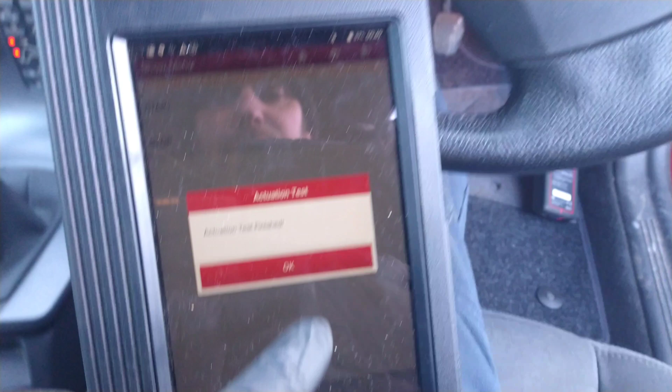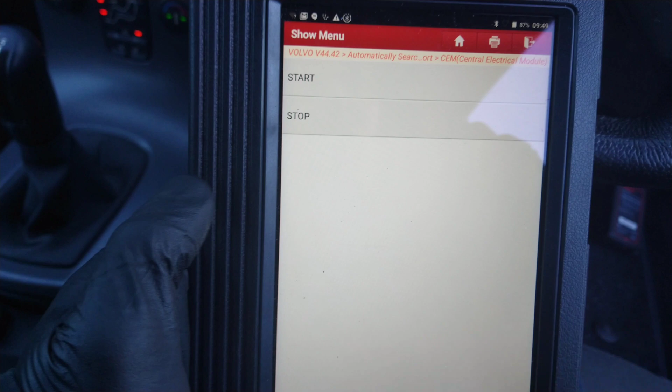Today I'm looking at a Volvo. This one has a problem with the boot won't open. So using the Launch I was able to activate it - I think you might have heard it there. So I know that the boot mechanism itself works. It's probably a switch fault if that's the case, so it gives us a direction.

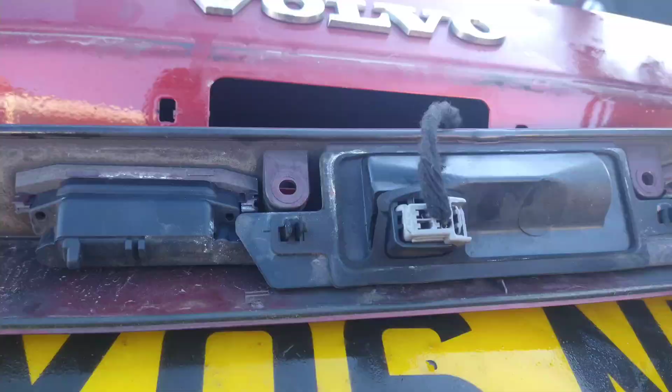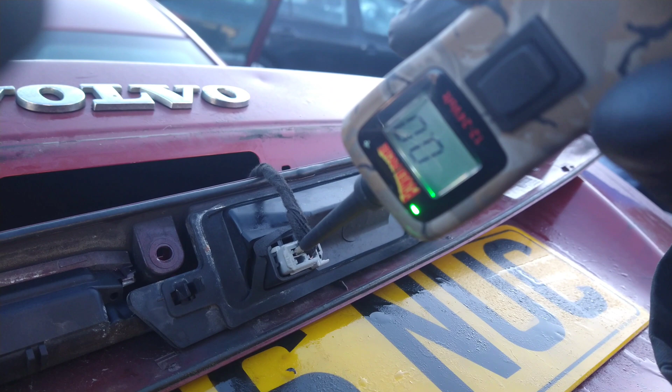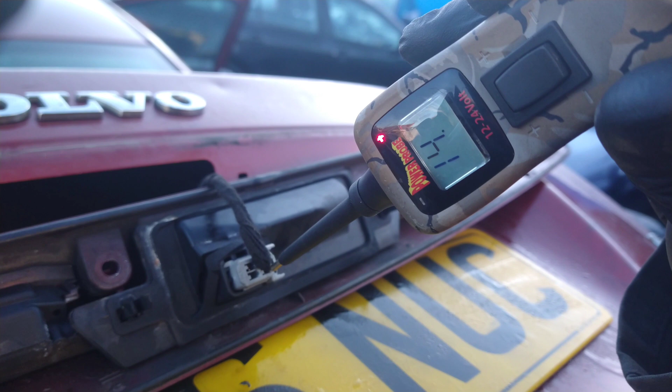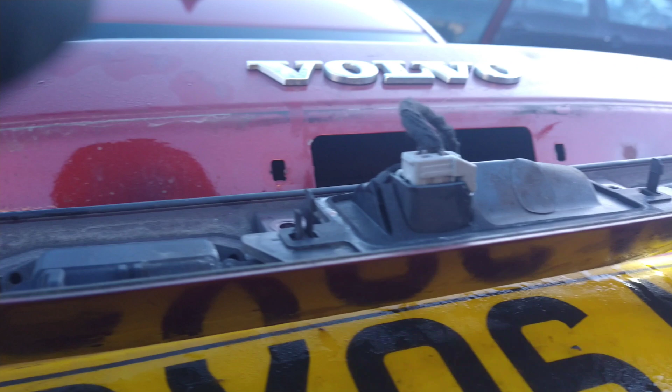If I go to the switch here, I've got a ground. It lights up with a green light, you see on there. So I get the ground with a green light. The power - you'll notice that when the switch is back in 2, it's actually duty cycled, and it's for the lights, license plate lights. When the car starts, it pulses the power, and when it's ignition on only, it's just on all the time. I've noticed that in a few other cars.

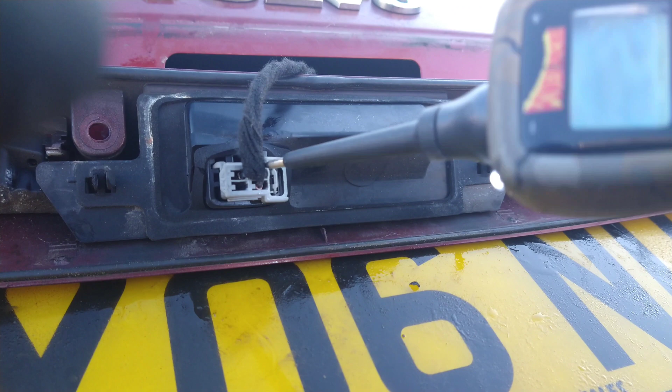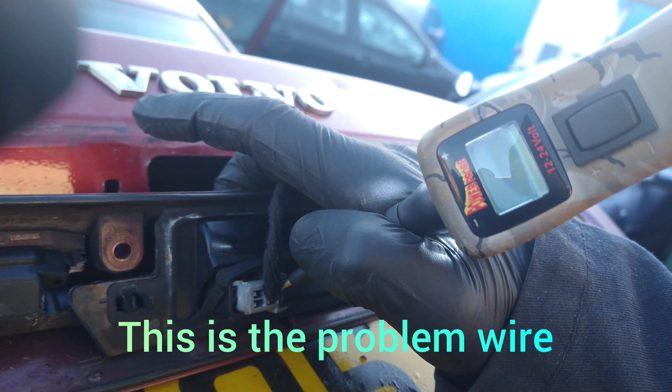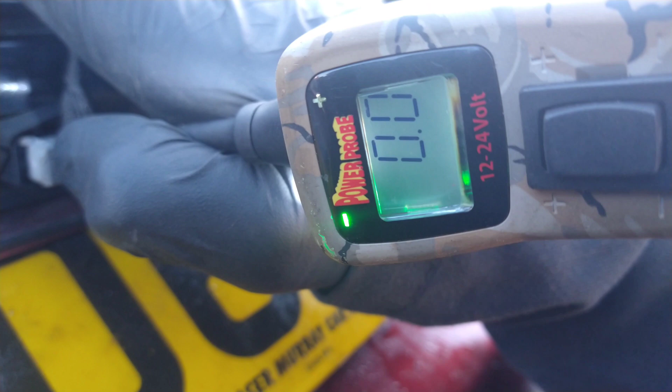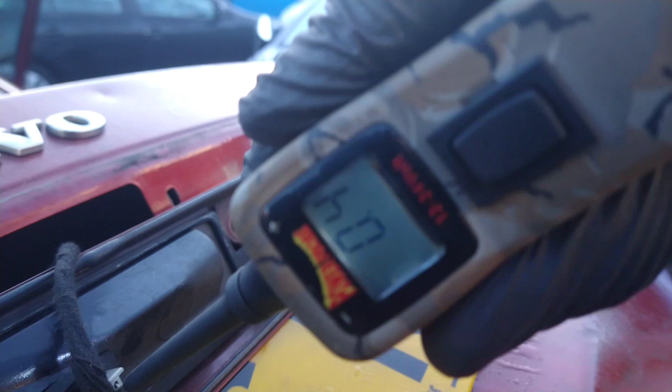And this last wire is doing nothing. I've got something there, occasionally I just got it there, but it's not enough. So what happens when I press the switch - it's hard to do it with not enough hands, but I'll try and press that. There, it lights up green. When I press the switch, it lights up green, so it means it gives it a ground. So I would expect some sort of a biased voltage. It could even be as high as 12 volts, but it wouldn't light up the light on here. It would just be a voltage, and that's not enough.

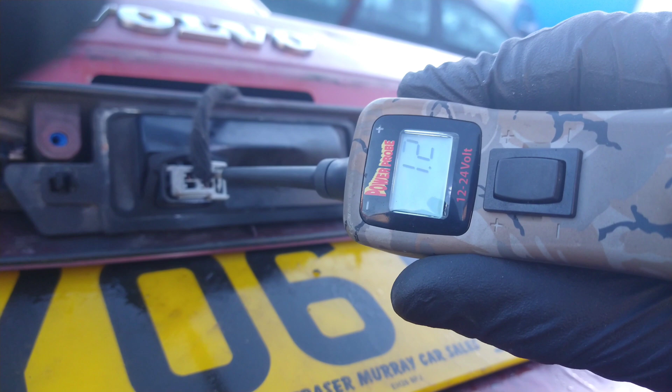So we now need to find out - that would be coming from the body control module, and when you press the switch, the voltage that was on there would get pulled to ground, because the resistor would be at the other end of the line in the body control module. And that would let it know to activate this.

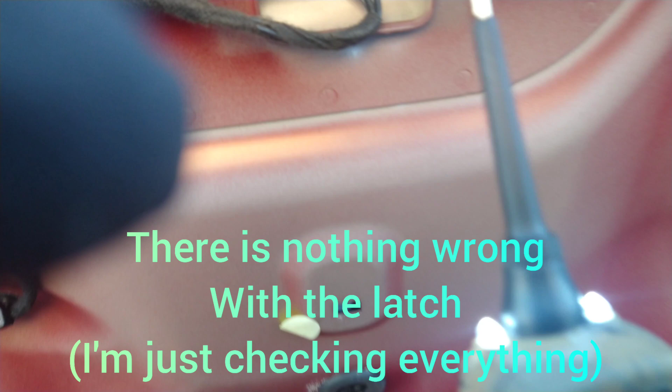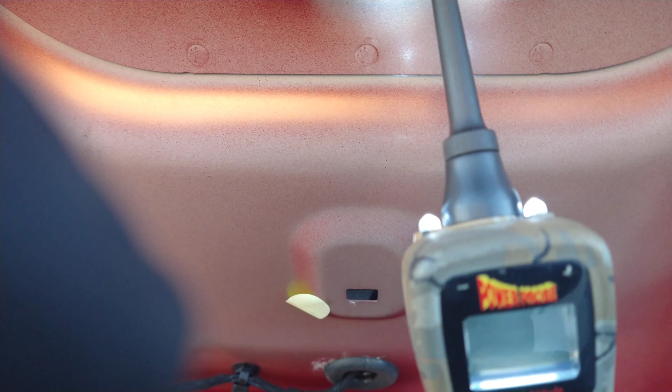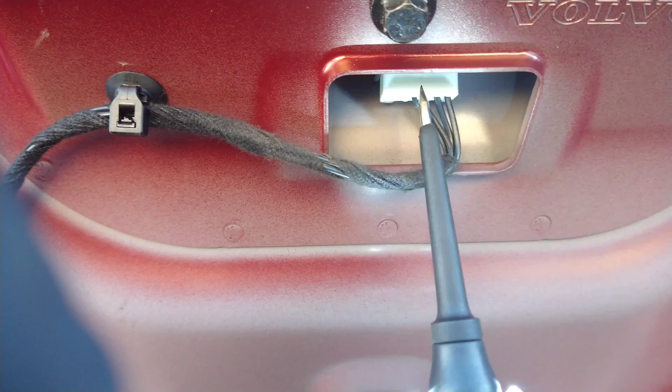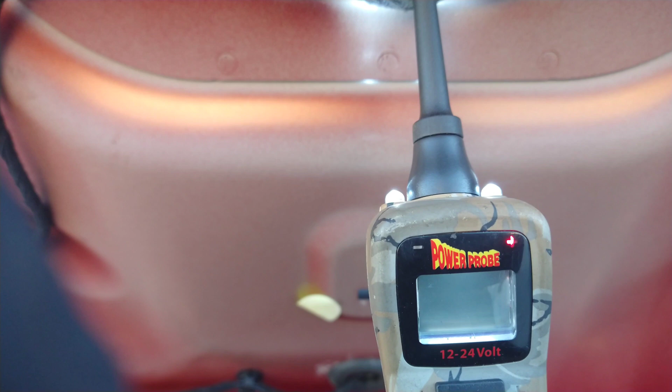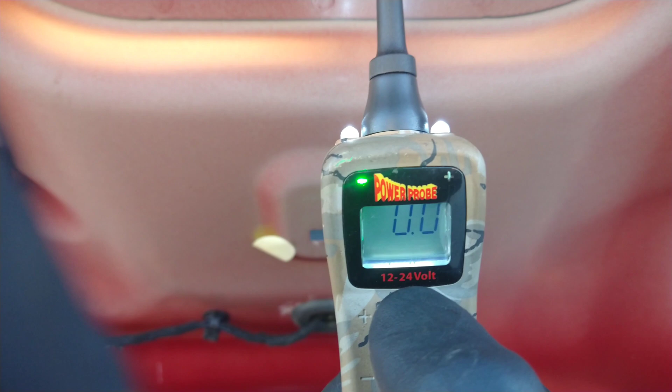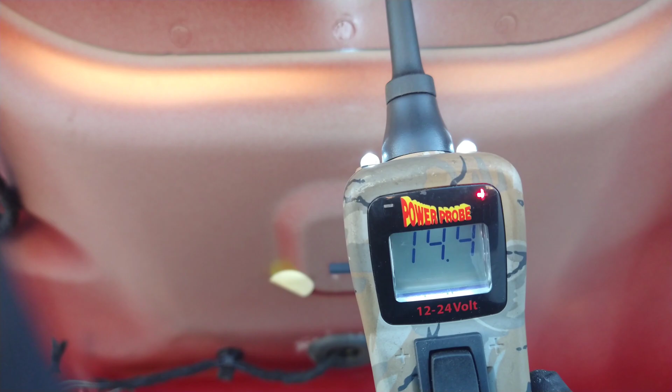So the first one's power, and the next one is ground. But if I open this, I'm going to give this very end one power. Let's open the latch. Now these 2 are the other way around. That one was the power before, and that one was the ground. So basically it switched them about, so it knows whether it's open or closed.

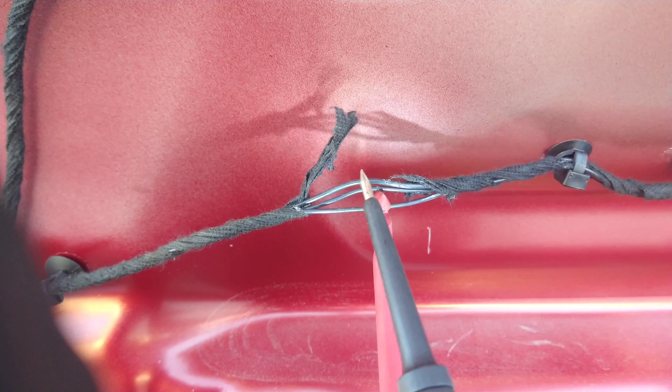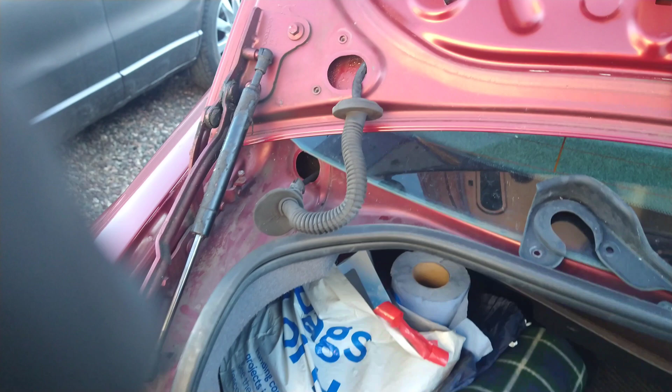That lot's all working fine. I know which one is the power for the lights and the ground, and this is the signal for the switch, for the micro switch to open the boot. So there's going to be a break somewhere. Usual place is to look in here, because it's a part that flexes. So I'm going to open that up and have a look for the broken wire.

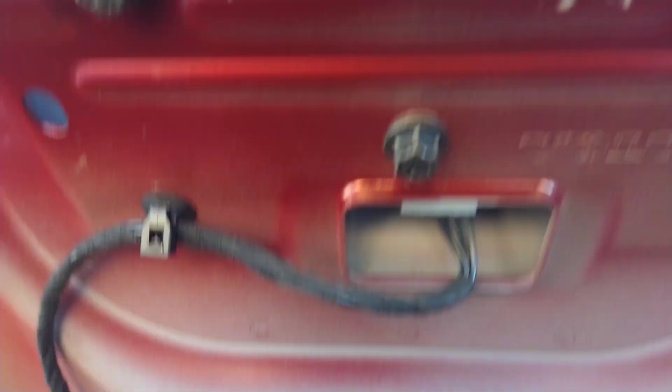Just a thought here - when you're doing this, I'll close that again and show you something. Right, that's closed. How do I know which one is which here? When there's 2 grounds, how did I know which one to put power to? Well, that was just simply by unplugging it. So if I could unplug that.

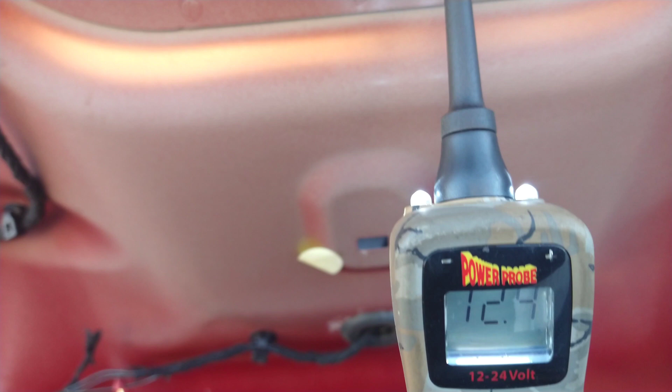So now we can see which one's gone away. And the end one, I'll go this way, might be easier. So the end one, you see we have voltage now. That was a ground with a green light. This one's voltage, but there's no red light. So it's like it's a computer signal voltage - in other words, there's a resistor before this, and then this will make the contact. So this is the ground side of the circuit. The one next to it is 0, and there's a green light showing you it's a ground.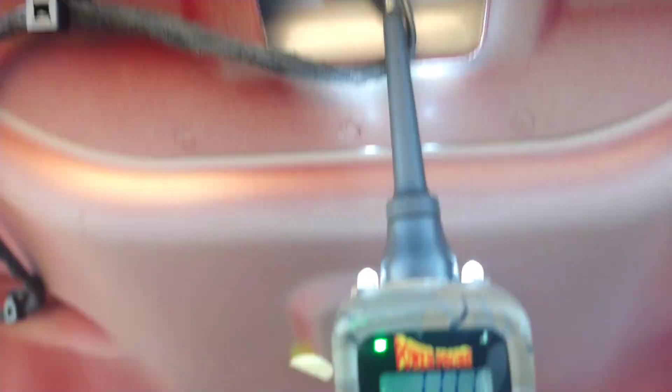So I knew if I gave this one power, it would open it. When I plug it in, like that, I've got 2 grounds, not just one, and one next to it. So that's how - the one that stays ground all the time, I don't give that power, is the other one. And that opens it. And then these 2 that were power and ground switch over, so it's ground and power.

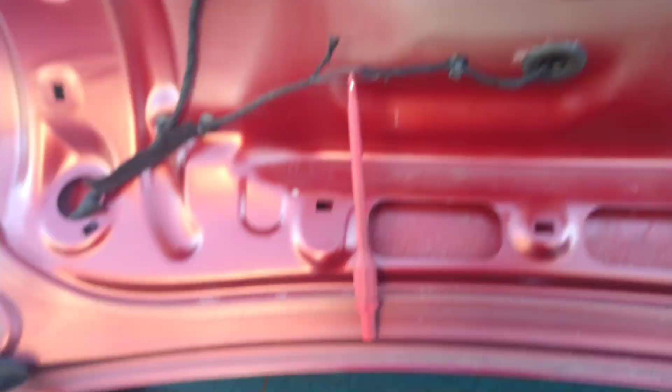This plastic, hard plastic part was inside here, and right at the end of where it sits, the wires must flex, right there, and it's caused breaks - going to fix them up.

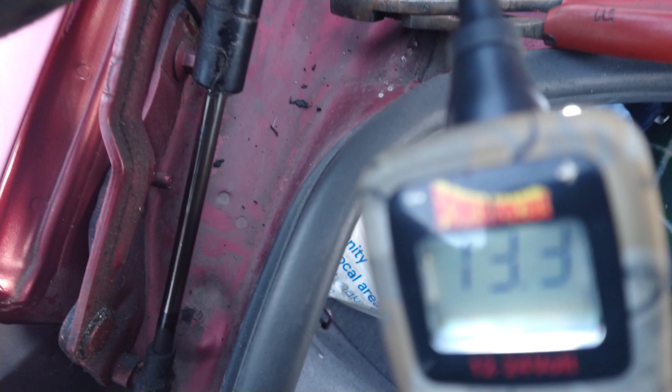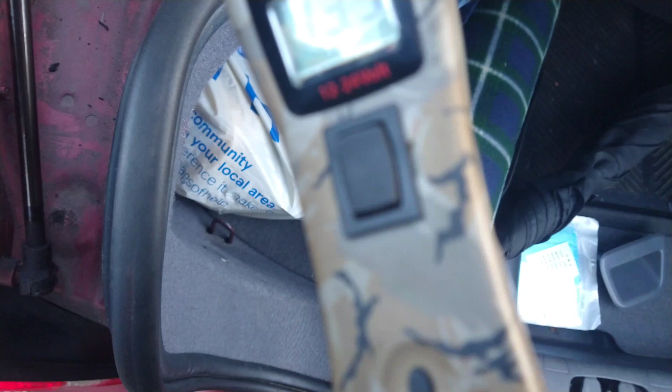Before I fix these, I'll show you this one wire that wasn't going anywhere. I've got 13 volts, and again you see how there's no red LED, so that must be the signal. I'm going to try - you won't be able to see this because I'm going to try and do it one-handed. I'm going to hit this switch there so I get a ground. And you heard that opened it, so that's sending the signal, so we know everything's okay.

Just got to fix this. Usually if there's something not working in a door or a boot or a trunk, tailgate, check the wires in the hinge. Anyway, I hope this gives a little understanding of what's going on with the position switches, how they work.

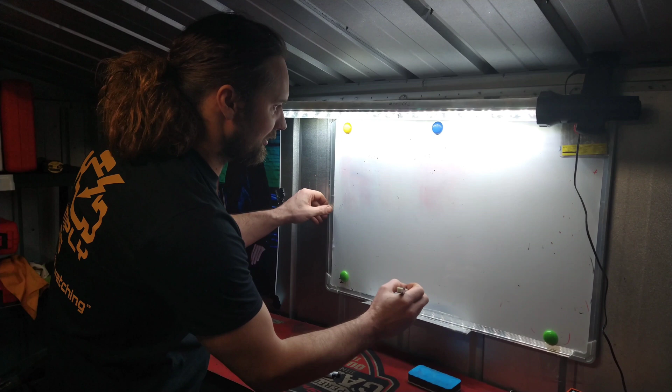What I'm going to do now is take a moment to explain what's going on with the wiring. I know a lot of people already know this, but I'll say it so that we all know. So what I've got here, I'm going to draw a picture, and this is going to be like a battery.

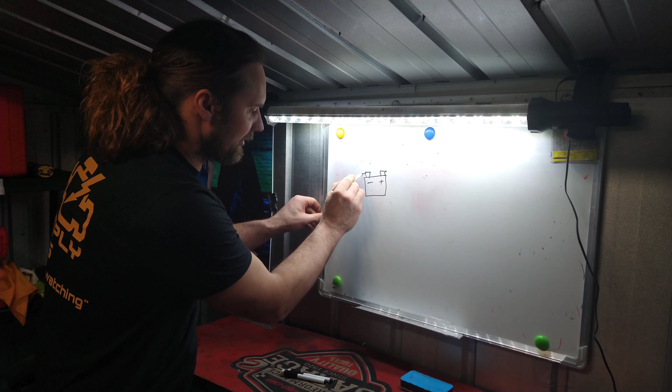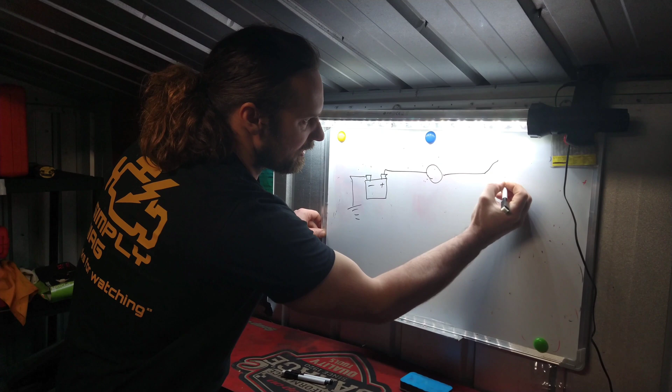Positive and negative on the battery, so that would go to a ground. And this one, I'm going to do like a light bulb and a switch. I'll just draw the switch like that, so it's open, and then that would go to a ground.

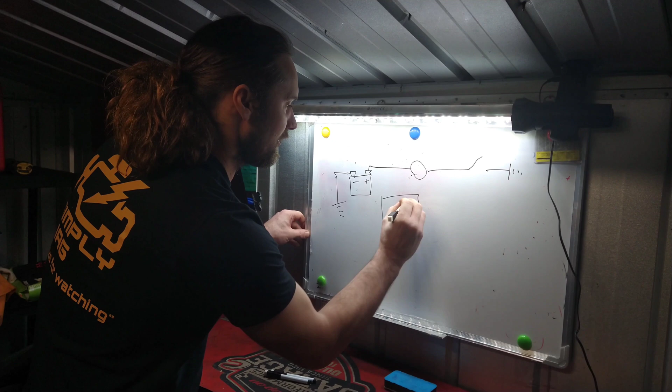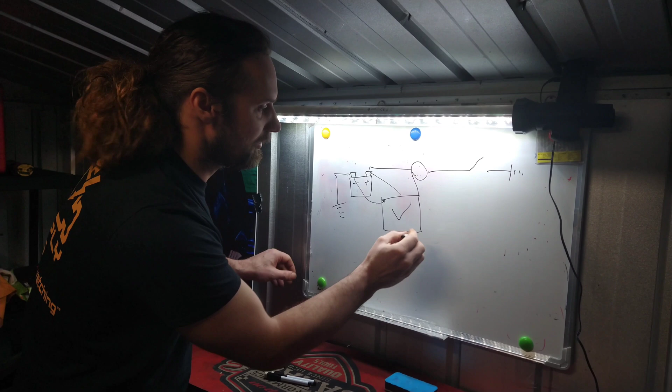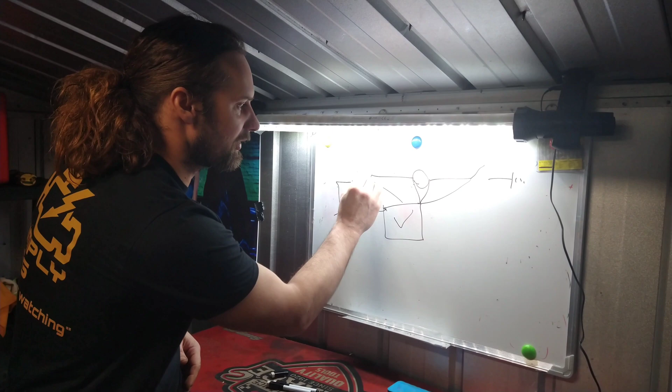So the idea is, with this, the light bulb's not switched on, we've got 12 volts. If I was to use a voltmeter in here, with one end on the battery negative, and the other end of the voltmeter, we'd get 12 volts here, 12 volts before the bulb, and even 12 volts all the way to the switch. Because it's not switched on, there's no current flow, which means the whole thing, including the bulb, is basically nothing more than a jumper wire.

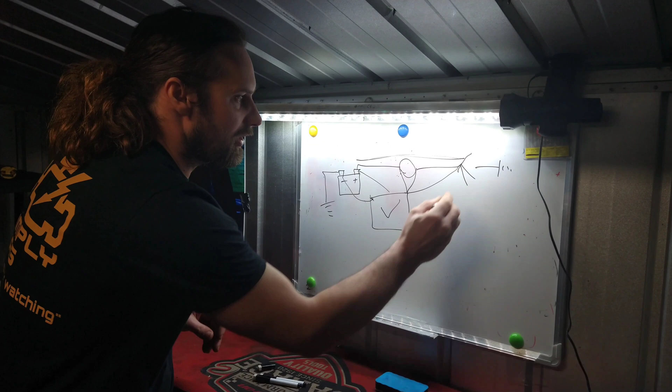It's just extending your test leads if you check it here, because it's not doing anything. So that's the same sort of theory. I'll take some of this off here so we can see it without all these squiggly lines. So we've still got the bulb in there.

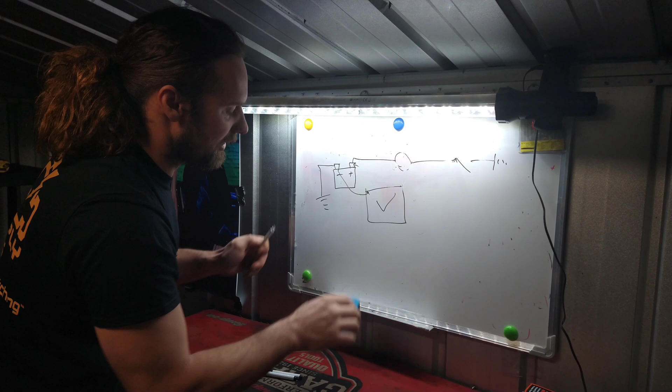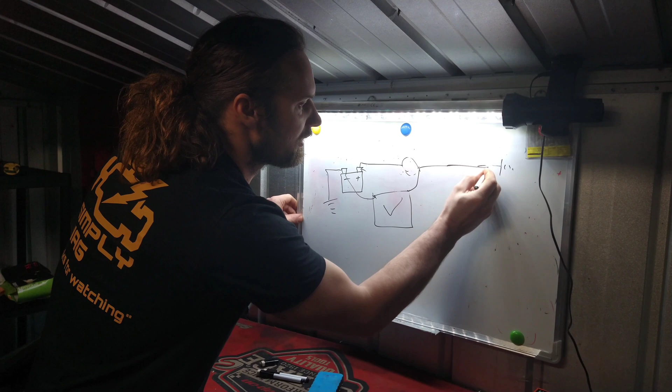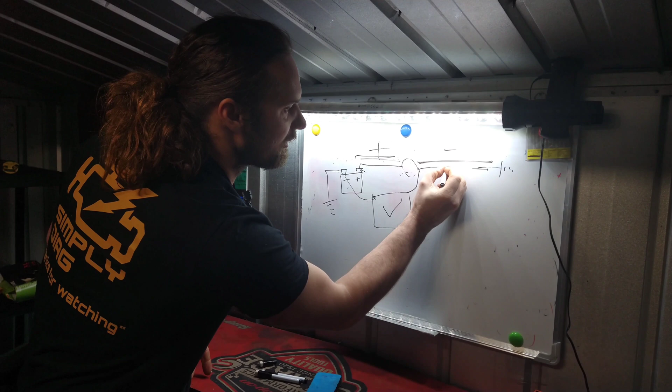So that would be 12 volts after the bulb if this switch was open, but if the switch was closed, this all becomes the ground side. All this bit would be the ground, and this bit would be the positive, with the switch closed. But as soon as the switch is open, the ground side would end here, and the positive would extend through to the switch. And that's what it's doing.

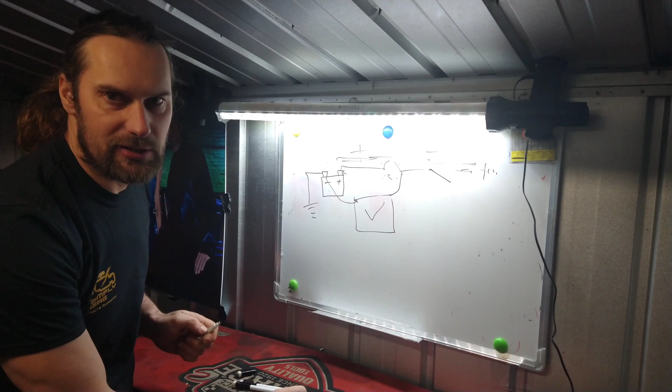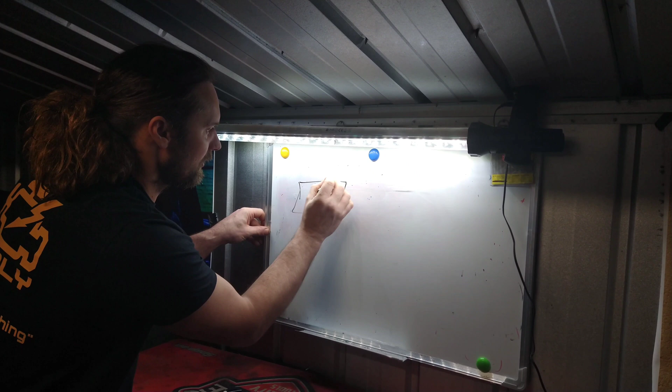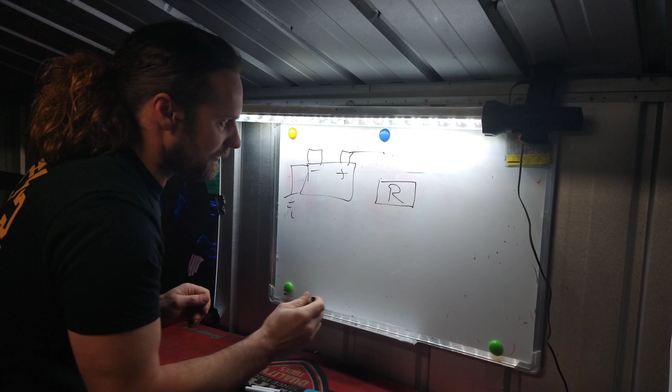So the only slight difference is they use a resistor instead of a bulb. I'll just show you that. So we'd have the battery the same, positive and negative, ground. And this one now, instead of a bulb, we're going to have a resistor. So there's the resistor, and it's got the wire going out to the boot latch, because this is a switch.

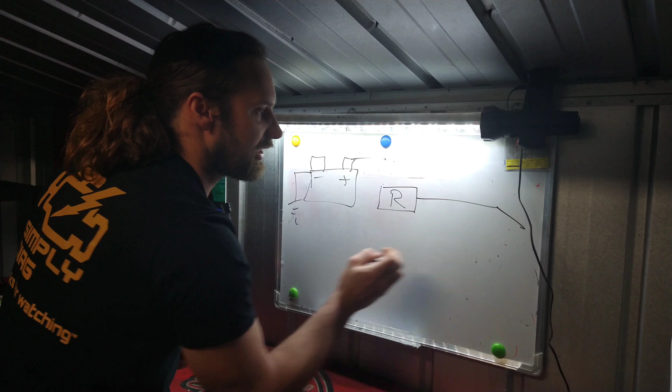We want to know the position of the switch, so there would be a switch at the end of there. So here's the resistor, and we've got the power going into it, and on this side we would have a voltmeter. So if that switch was switched to a ground, this would go to 0 the same way it would with a bulb.

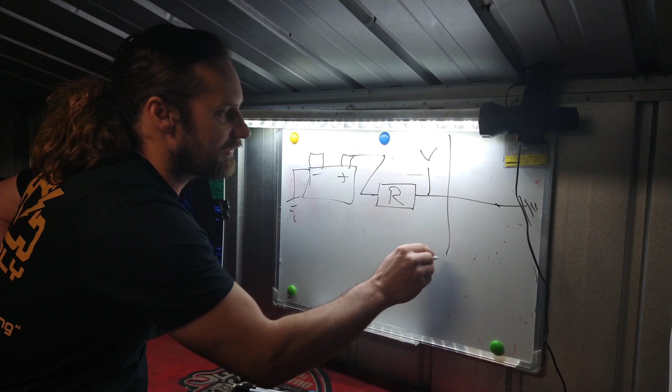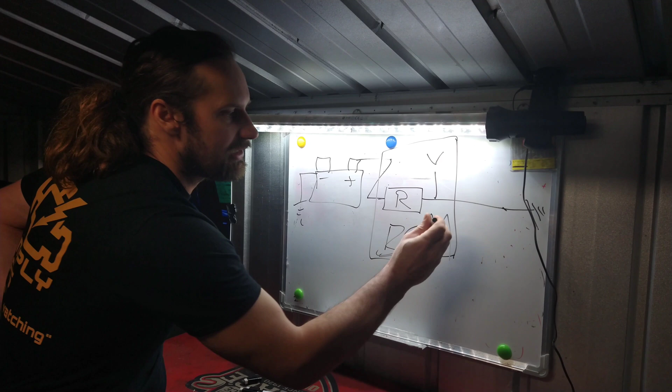Now the difference is with this, it's using the module, the body control module. So if you imagine this resistor and the voltmeter is inside a body control module, that's all inside it, so it knows whether this is open or closed. You'll see 12 volts on there when the switch is open, and when the switch is closed, for the same reasons as the bulb, that would be 0.

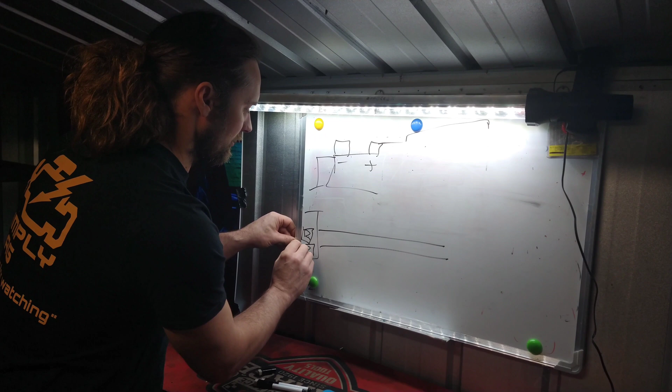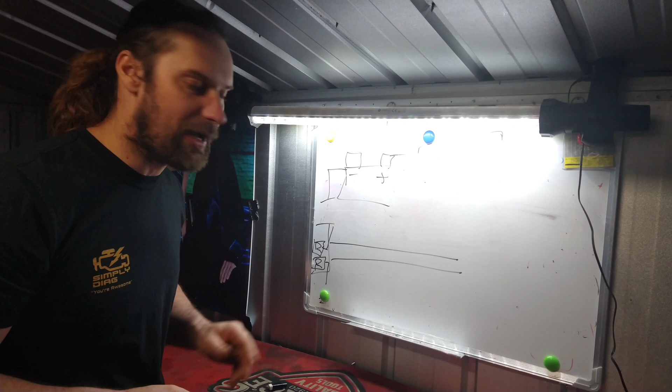What I'm going to do now is show that we've got two switches, but it's the same idea. This is the BCM, and we'd have the resistors inside. We've got like they're not voltmeters, but it's like having a voltmeter inside. It knows whether it's open or closed by monitoring the voltage on that wire.

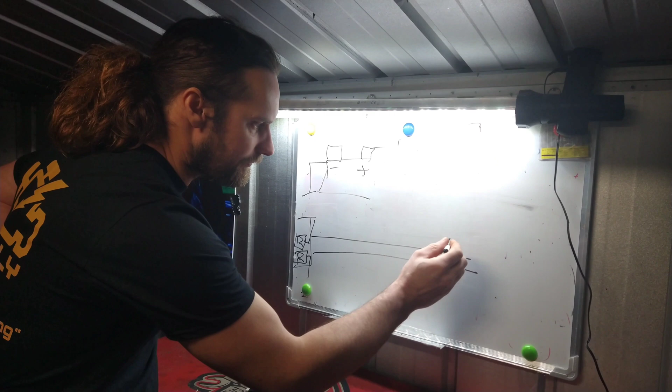So again, when it's open, when they're both open, they would both be 12 volts. And when it's closed here, the whole wire is then 0 volts. So the body control module knows when it's open.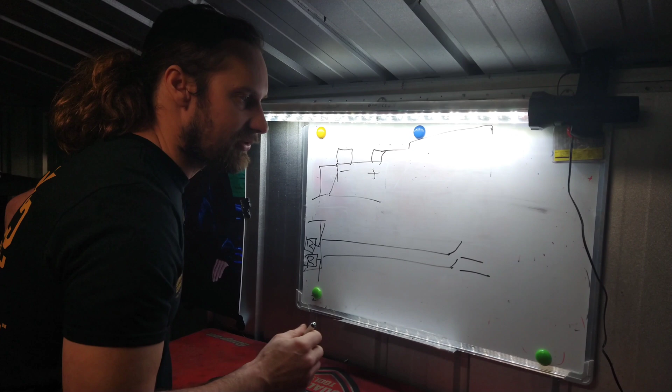One of these could be located in a way so that when the boot latch is open, like unlocked - I don't know how to draw that as a latch, but it's kind of like, you know how it hooks around something? So that would be the latch there, and it would hook around.

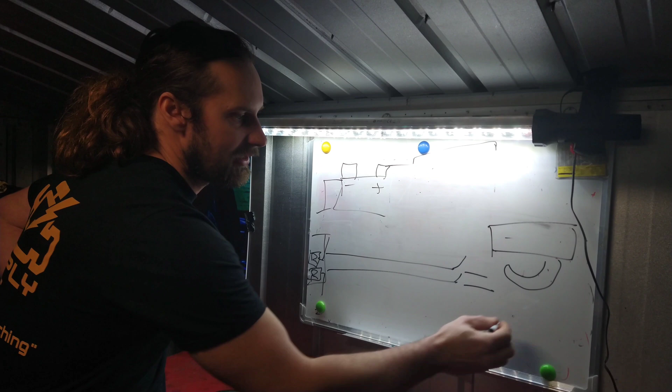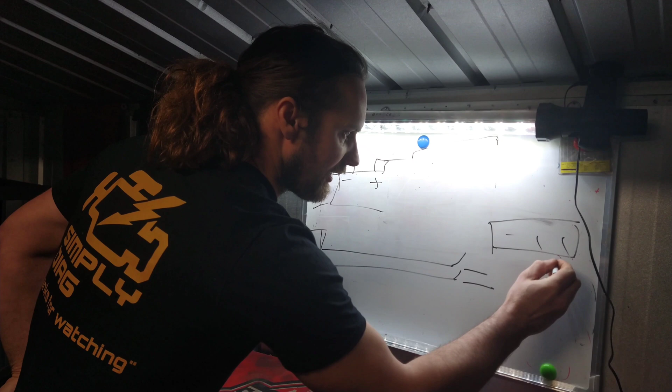So it would have a micro switch inside, one that knows when it's in that position, and then when the boot latch is in the open position like that, it would know it's open. So then it's got two ways of knowing the position.

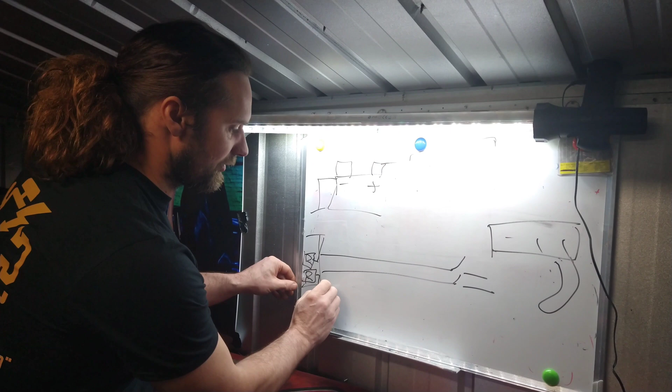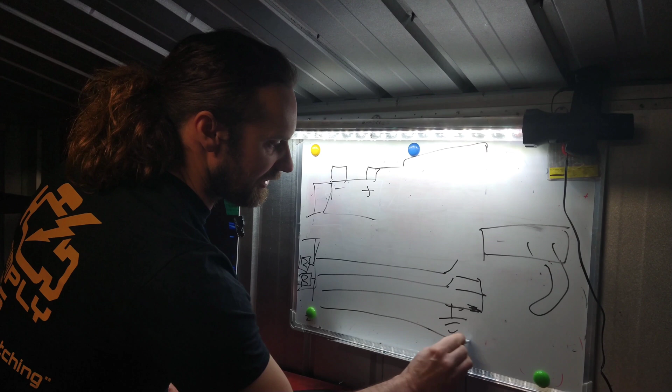Also in this boot latch we've got two more wires. One of them is a ground, and that's where these two wires get the ground. They would come back through this one, the ground wire, and then the positive that comes out. And these two also go to the boot actuator.

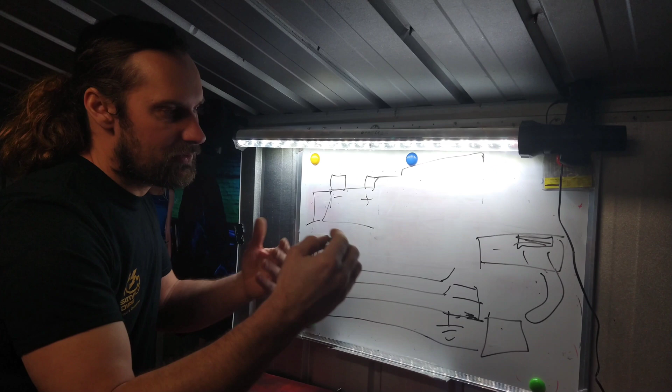Well, that would be here, if we were drawing it. It would be in here, a little actuator to open, to allow it to unlock anyway - to allow it to open. So that's what's going on with all that. So I thought I'd try and draw it a bit.